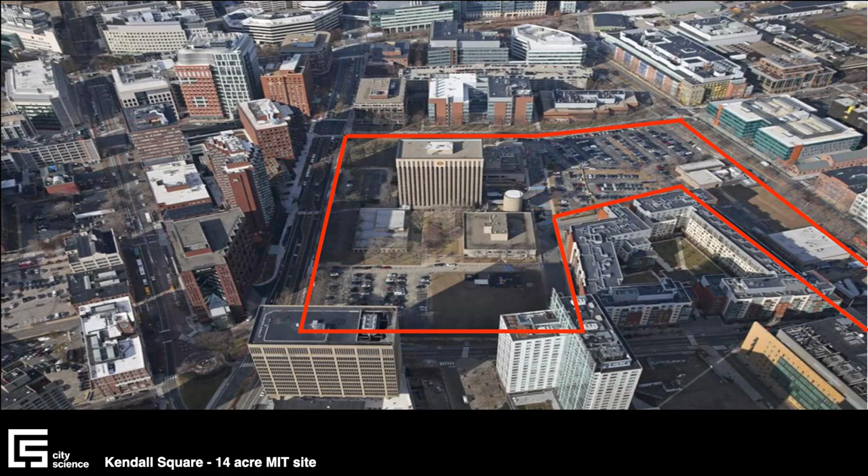That red area is the Volpe site, this 14-acre site that MIT controls. The planning's largely been done. It's under construction. But I think we could have used that site and other available sites to really transform Kendall Square profoundly.

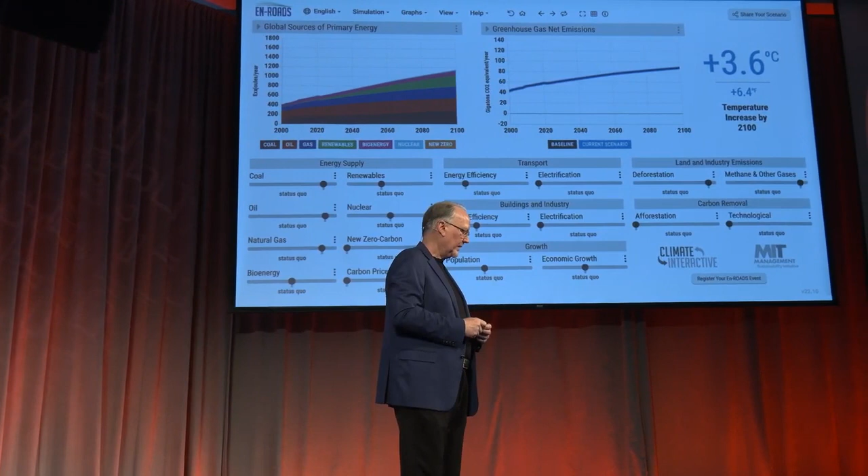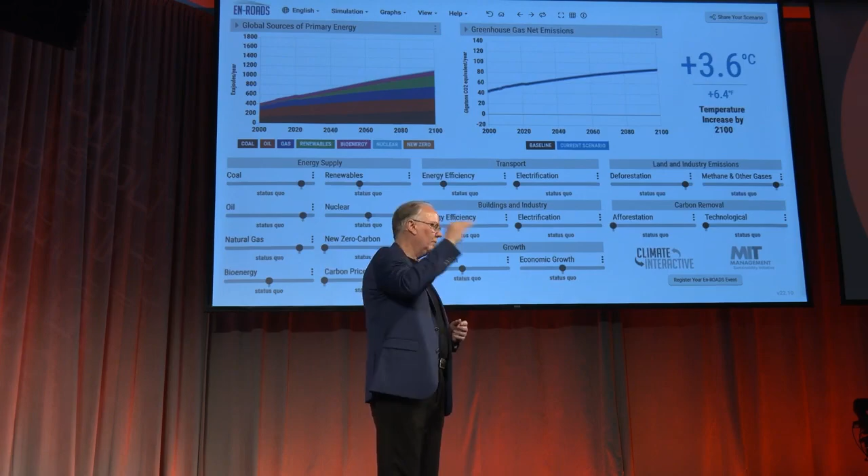This is the En-ROADS project that we were inspired by. It's put together over at Sloan, but it's really top-down government action. What could take place at the national, international scale? And dealing largely with public policy. We put together the complement of this, so think of it as the bottom-up model. This looks a little complicated, but it's pretty easy to figure out if you know the code.

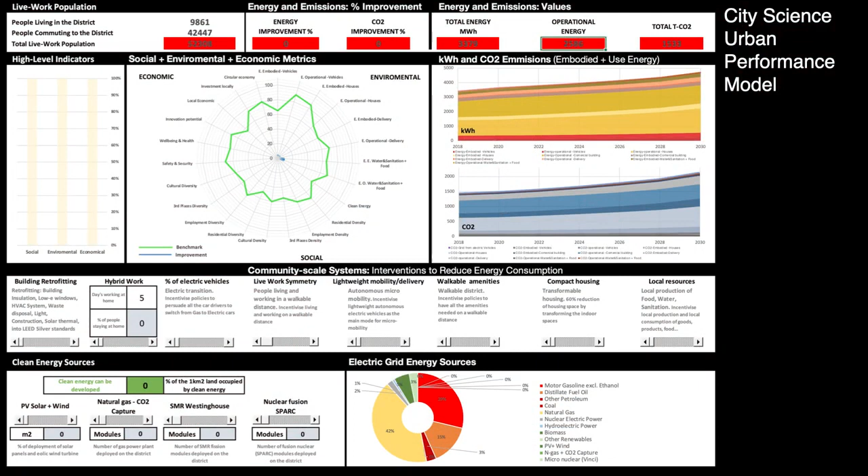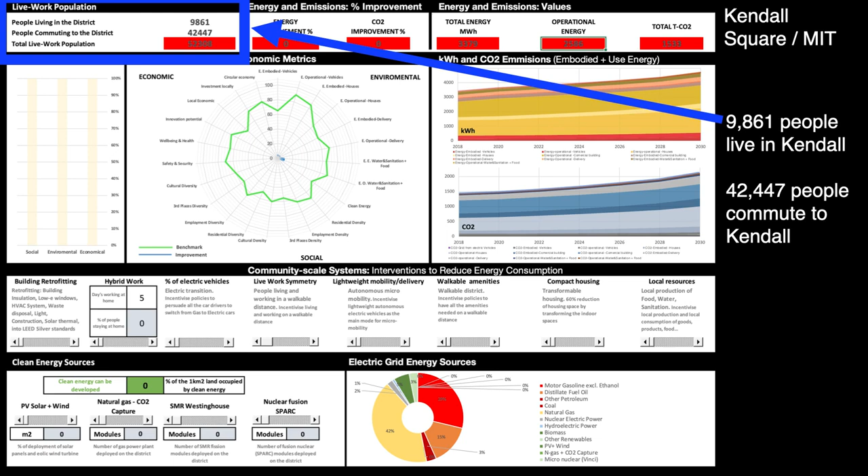So up in that upper left box, you can see 9,800 people live in Kendall Square, 42,000 people roughly commute in and out every day. So tremendous waste of time and resources. Then we can look at all the key community scale interventions that we're modeling. There are others, but these are the big ones, I think. We can look at the impact of all those interventions for lowering energy consumption, lowering CO2 emissions.

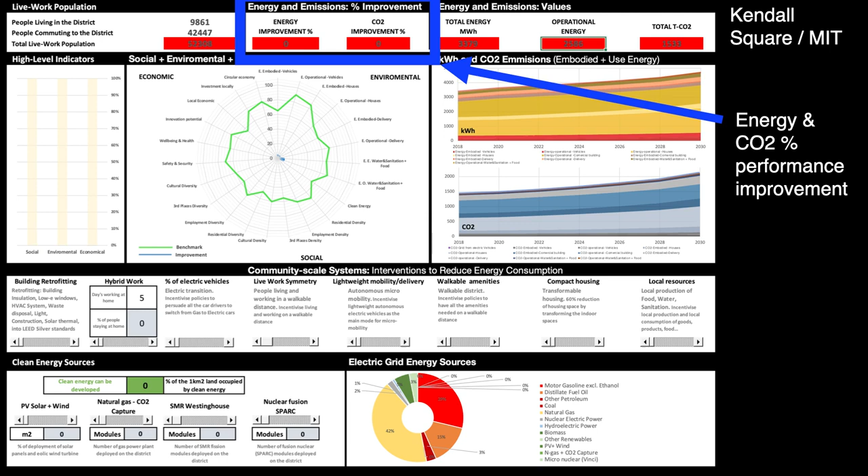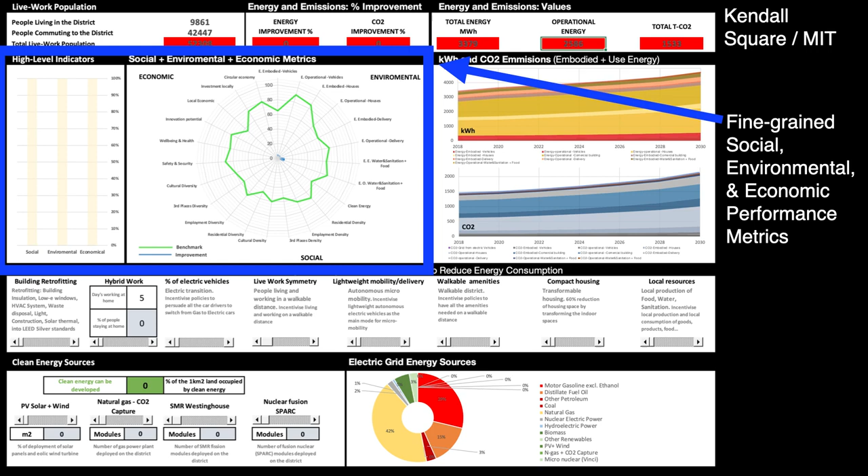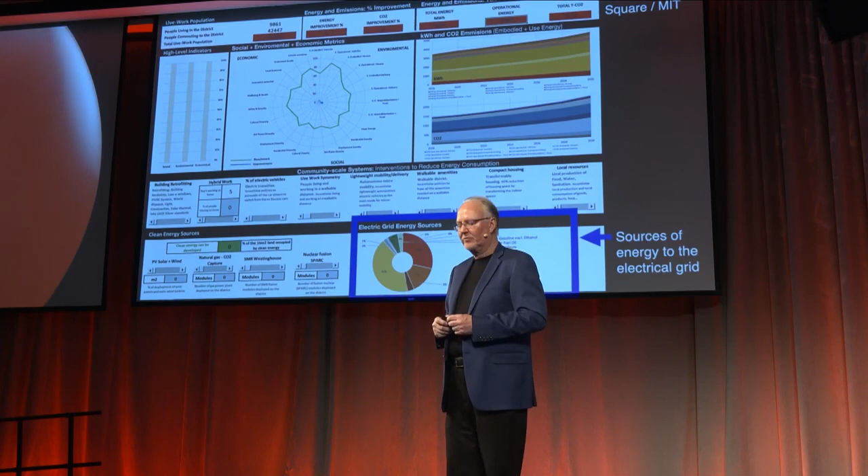They're not quite aligned. Then we can look at a fine-grained model visualization of the social, economic, and environmental metrics. We can look at different percentages of renewable energy that could be introduced to the area, and then finally we can look at what's being supplied on the grid, okay? So let's go quickly through these community scale interventions.

So renewable energy to the grid, we just take the Massachusetts roadmap. You can see there's not a whole lot of solar being added between now and 2030, wind, et cetera. So let's just accept that. Then let's look at electric vehicles. These are the kind of conventional green city solutions, electric vehicles.

So we took the MIT transportation survey, and from that survey we know where people live, we know their schedule, we know where they work, we know their commuting mode, whether they drive by themselves or carpool, et cetera.

We did a little thought experiment again. What if everybody drove an electric vehicle? So you dial that up to 100%. Every single person who's commuting in, those 42,000 people, are driving electric vehicles. So what does that do? We start at 17.19. That gets us down to 15.5. Electric vehicles plus decarbonizing the grid with the Massachusetts roadmap. Not going to save the planet.

Then we looked at hybrid work. I suspected that hybrid work for the pandemic was actually dramatically lowering emissions. We went from corporate-centric to more of a distributed model, people working from home. And what we found out is that even if you introduce significant hybrid work models, in this case 3 days a week, 100% of the people working at home, it doesn't change much because people are using more air conditioning, they're driving more locally.

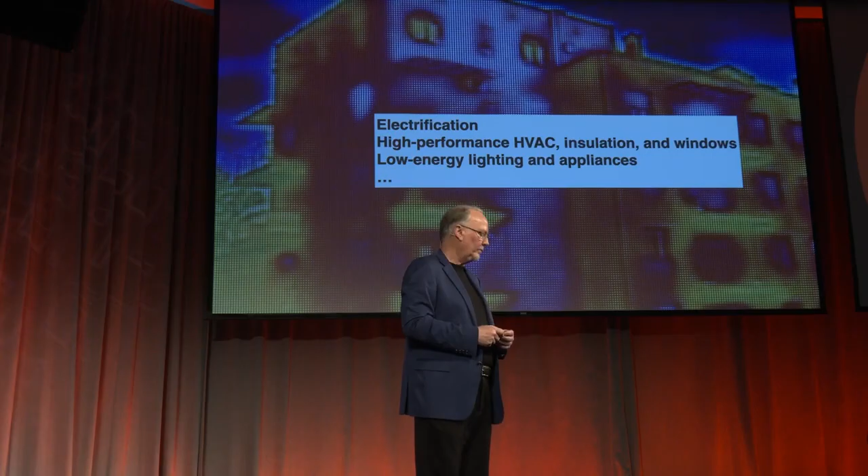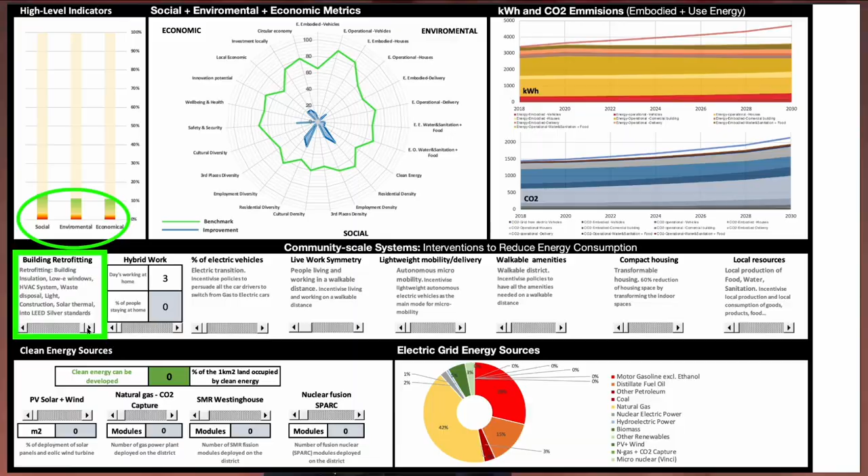Deep retrofitted buildings. This is, I think, a critical area that we certainly should do. Electrifying buildings, high performance HVAC, insulation, low energy lighting and appliances and the like. Okay, so let's look at that. And by the way, I should mention in the upper left hand of the screen, you can see the social and the environmental and the economic. What we're looking for are solutions that ideally do all three. So this does have some social and environmental impact. Economic, essentially none, because you can introduce better ventilation, et cetera.

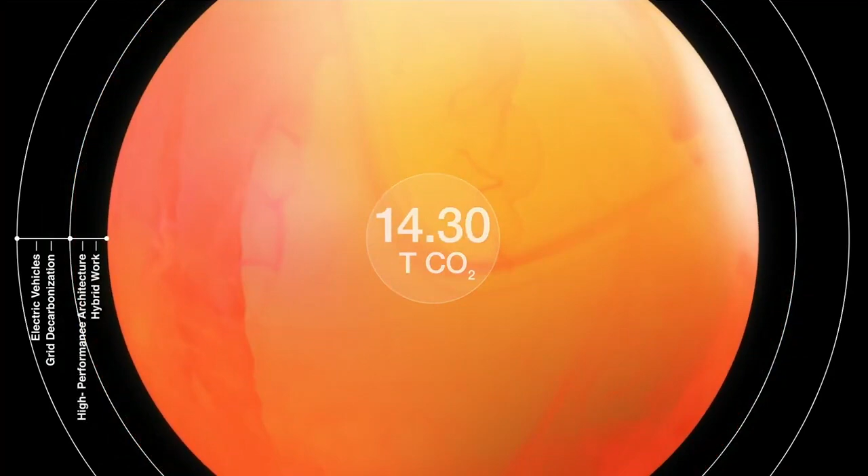Anyway, so we're starting a little over 15. So high performance buildings, hybrid work gets us to 14.3. We're not anywhere near 2.5. Live work symmetry. So this is a pretty radical proposal. This is saying let's build housing near workplaces such that everybody that works at Kendall Square has an opportunity to live nearby within walking distance. And that would mean essentially all housing for all the available sites at much higher density than the zoning allows.

So we built a CityScope model of Kendall Square. You can dynamically adjust the land uses and the building heights and the density. You can see the impact on this radar plot, which reveals the various performance characteristics. So let's dial that up to 100%. Now, everybody who works in Kendall is living in Kendall. What does that do? Oh, first, okay, we have housing in sync with jobs. We also need amenities, right? Because if you don't add the amenities nearby, then people will just drive a lot to Costco and the grocery store and whatever.

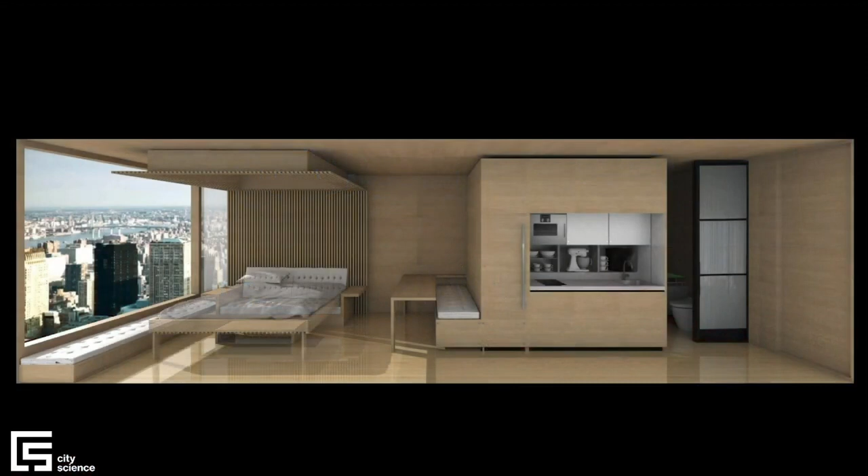So we've been looking at transformation. How can you use architectural robotics so a small apartment functions like a bigger apartment? If you can create a 500 square foot apartment that functions like a 1,000 square foot apartment, that's half the embodied energy, half the operational energy essentially, and close to half the cost if you build sufficient housing. So we, some years ago, launched a company to do just that. People thought we were crazy to have beds that drop down from the ceiling, but now we're making this work in the marketplace. This is an apartment in New York that some random person shot a TikTok video of.

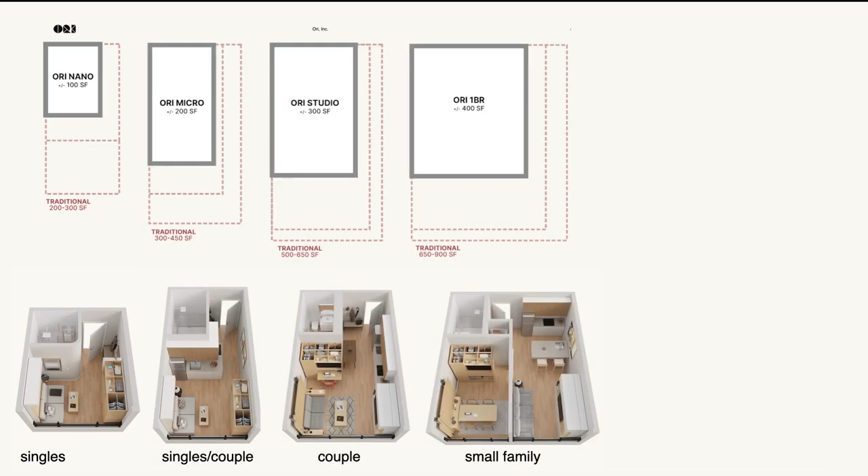You see, you've got an office on demand, a walk-in closet on demand, the bed drops down from the ceiling. You can visit this, it's in New York. Anyway, we're now in 100 buildings in 50 cities, so we're getting traction, so I do think this is part of the solution. In fact, you can see the little nano apartment, 100 square feet, that functions about like a 200 or 300 square foot apartment, or a little bit bigger. So it's not about the tiny apartments, it's about how efficiently you use the space using transformation. You don't need a bedroom during the day or a living room at night. You use the same volume for both.

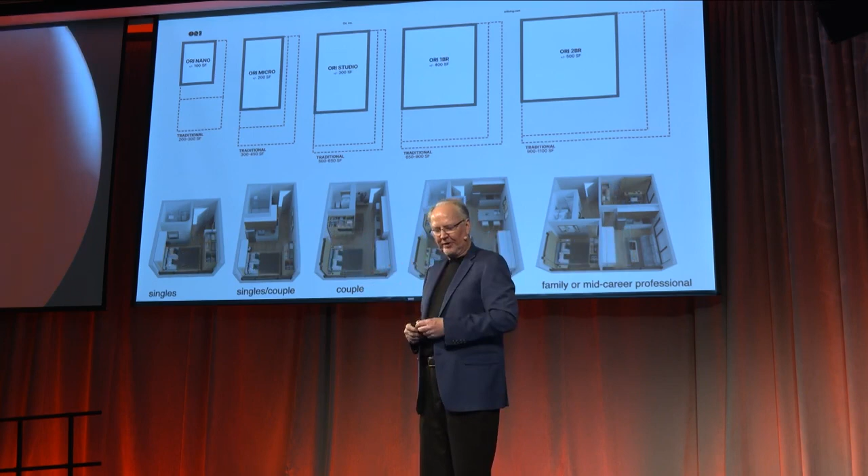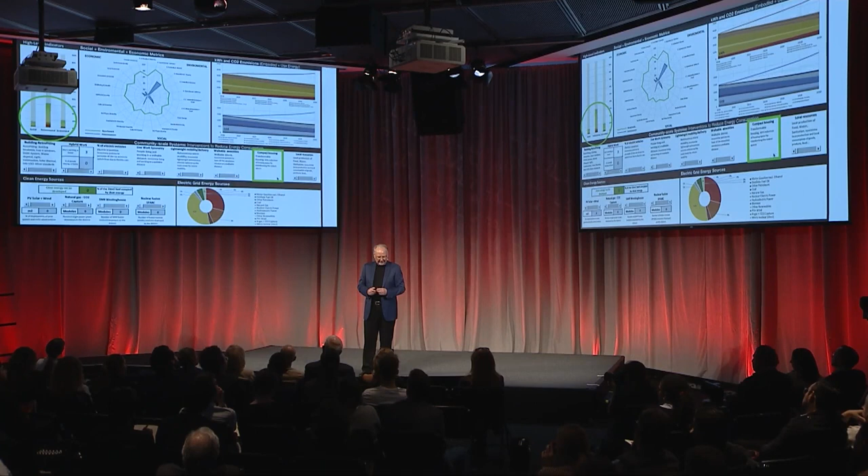So with our CityScope platform, we can now move these land use types around, but you're dragging people with them, profiles of people, and as you change the density, you can update the simulation and assess the human dynamics of a neighborhood as a function of all these properties. So now we create compact housing. We've reduced the bulk dramatically because we're using space much more efficiently.

And the social performance goes up because you create more affordability and equity and the like in the city. Tremendous impact on the environmental performance, as I said. So 8.54 goes down to, well, not as much as I was hoping for. But anyway, it's something that we need for both social and economic and environmental performance.

Lightweight community mobility. So people are living near where they work and they have all the amenities they need. It would be insane to drive a 4,000-pound vehicle that's capable of going 160 miles an hour across Kendall Square to go to the grocery store. So we're looking at lightweight mobility that has some of the properties of bike share and Uber and ride share. We developed a whole suite of little lightweight vehicles that you call like an Uber. They come to you, they act like social robots in the city and good citizens to pedestrians.

This is an early prototype. We have newer ones. Naroa will talk about that a little bit later. So now we introduce lightweight mobility. What does that do? We're at 8.2, 8.17. Well, they're already very efficient and we've already gotten rid of cars. So it's not surprising that the environmental impact is not as great as it could be if you didn't have the live-work symmetry, but there's a great social impact because people have mechanized mobility solutions within the neighborhood.

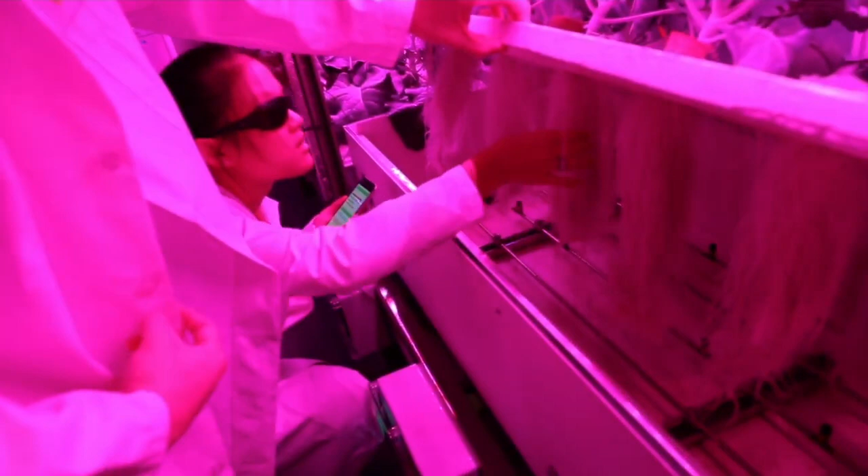Low carbon diet, local production. So the typical American diet is 2.8 tons of carbon per person per year. That's already above our total of 2.5. Okay, so we do a plant-based diet and local production. We think we could probably get it down to 1.4. I think we could even go further. We need a lot of innovation in this area. So some years ago, we built the City Farm project right downstairs, looking at aeroponics, production near the point of consumption. We operated this lab, I think, in 2013 to 2015.

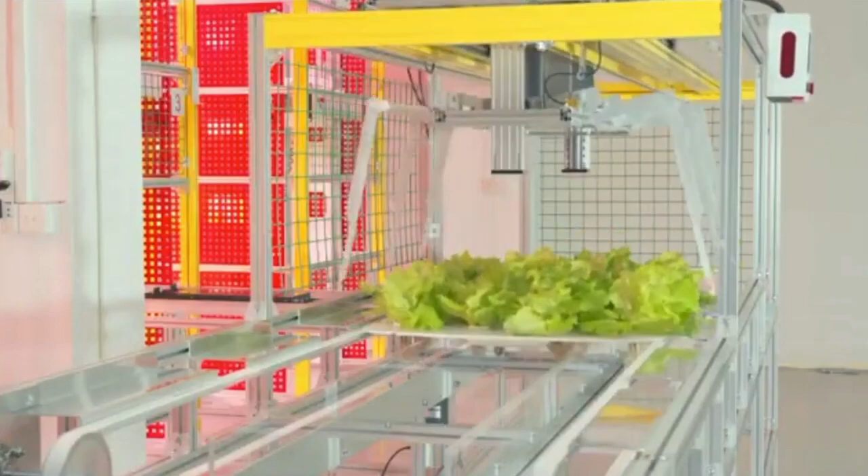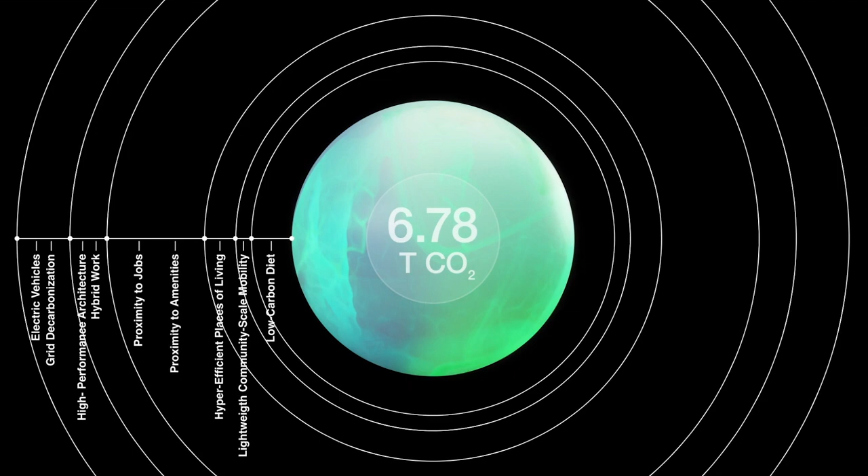Recently, there's been this explosion of creative activity in industry. These are robotic, urban, agricultural systems, automatic planting and harvesting, et cetera. And there's lab-grown meat. So I think eventually we'll be able to get a synthetic ribeye and enjoy our meat without the environmental harm of meat. So now we dial that up to 100%. Everybody is eating plant-based products, grown, produced near the point of consumption. We're 6.78. So we've reduced the emissions about as far as we can through those interventions.

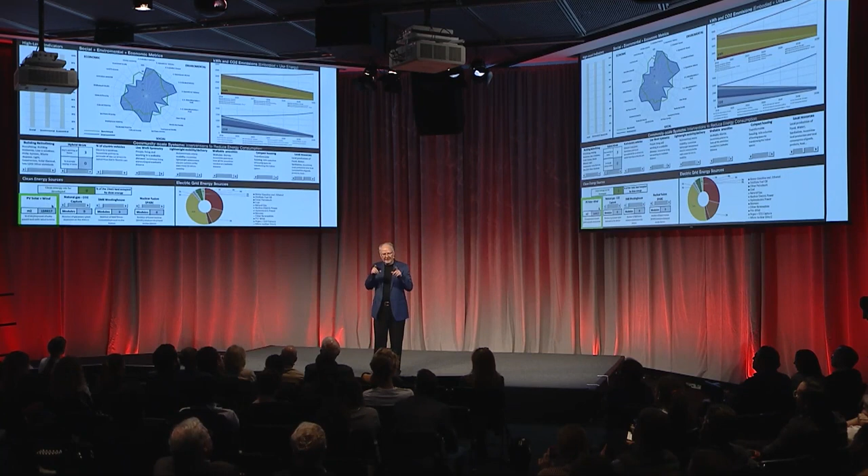We now have to look at sources of clean energy. So solar is great. You need a lot of land to power a high-density city like Cambridge. We don't have land around here. There's tremendous opposition to expanding the grid. I do believe, just like food near the point of consumption, we need power near the point of consumption, high-density power. And so in this case, we dial photovoltaics within Kendall Square using every available surface, and it barely moves the needle. We just don't have enough surface area to capture enough photons to make a difference in a high-density neighborhood.

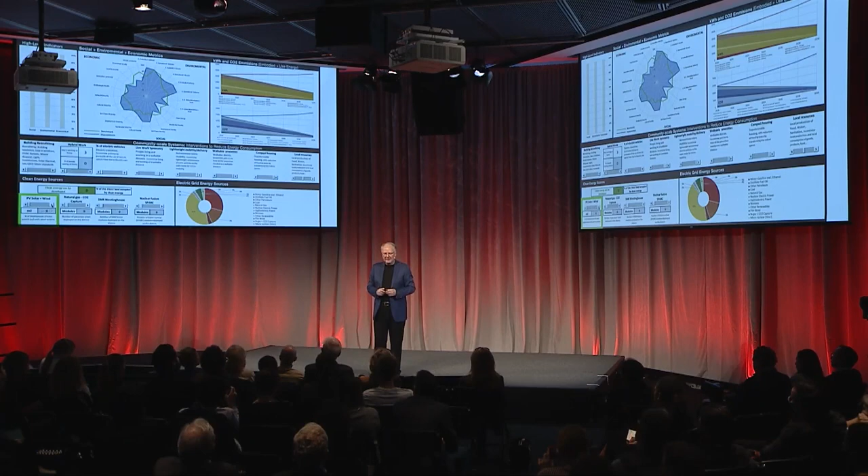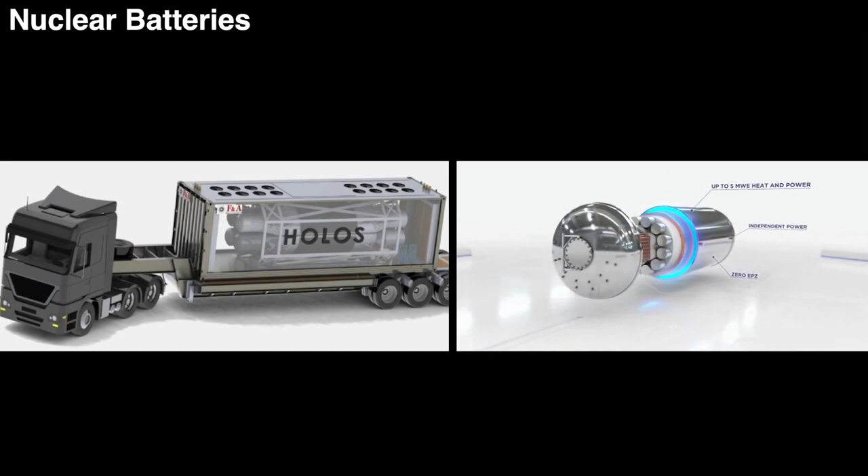But there's a whole generation of new technology. These are nuclear batteries. Some call them small modular reactors that are a little bit bigger, anywhere from 5 to 20 megawatts. They can be shipped on the back of a truck. There's no reason why they couldn't be powering Kendall Square, a resilient microgrid within the district. Ultimately, though, we will have fusion. So I'm very interested in how we design fusion-ready cities. It's very different than how you design solar-ready cities.

Now, think of this talk right here as an introduction to a series of chapters. So my team, we're going to have 6 quick talks. They're going to take the key elements of this model that I just outlined and give you a little more detail. And this is a model we're going to be working on, I'm sure, for years, and we need all of your help. It really is a work in progress. We just went public with this model 2 weeks ago at the Technology Review Climate Tech Conference.

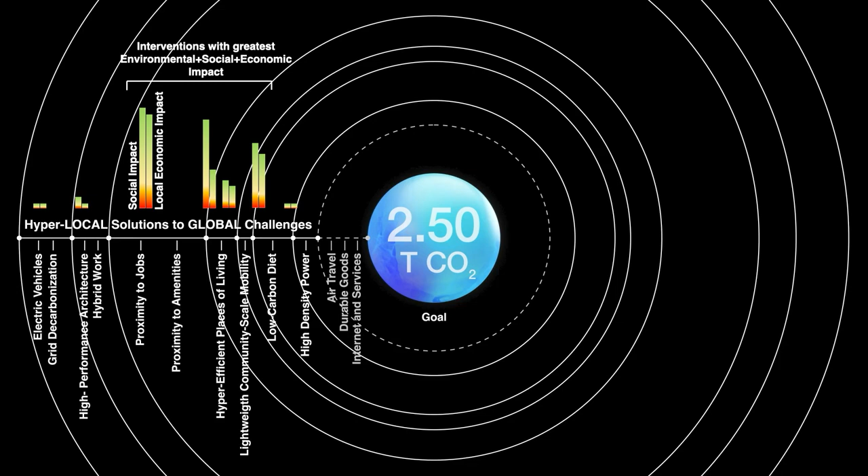So one thing I want to point out is a lot of the thinking is on the outer ring and the inner ring. You know, electric vehicles, decarbonization, air travel, the grid, et cetera. I think the big action, the big impact can happen in those middle rings, because those are the areas where it's a win-win-win, where you get the environmental and the social and the economic benefit. So, okay, remember we start at 17.19. Let's just accept the conventional green stuff. Electric vehicles, decarbonization of the grid, and I'm going to turn it over to Luis Alonso to take it the next step.